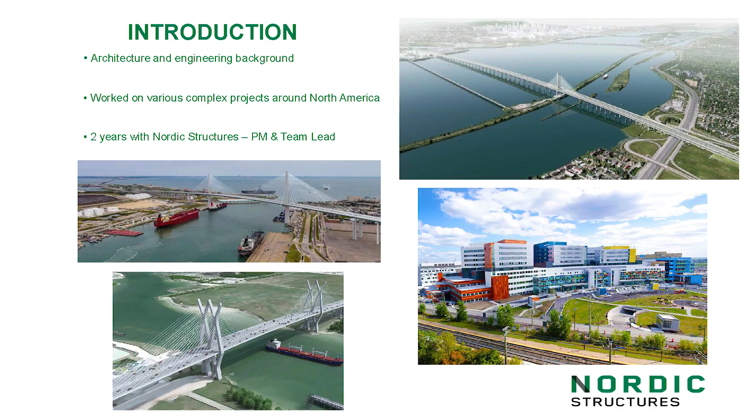I have worked previously to Nordic on various complex projects around North America, namely the new Champlain Bridge in the Montreal region that crosses the St. Lawrence River, as well as the McGill University Hospital, that is a super hospital in the Montreal area. Closer to you guys, I have also worked with teams that have done preparatory work on the Sam Houston Bridge, as well as the Corpus Christi Harbor Bridge.

I've been with Nordic for 2 years now, started as a project manager and am now a project manager and team lead.

Our company, Nordic Structures, is a subsidiary of a company that is called Chantiers Chibougamau. The sawmill and transformation plant is in Chibougamau, Quebec. For anybody that's not familiar with Chibougamau, which I doubt you are, it's about 800 kilometers, so 500 miles north of Montreal in Quebec. So if you see my cursor, it's right up here, and Houston is right down here.

About 2,215 miles from our factory to the San Jacinto College site. We are a vertically integrated company, meaning that we own our own forests, forestry service, and we also do our harvest and replanting ourselves. We have the sawmills that do the transformation of the raw wood, either to construction wood or to our engineered wood products.

It's a privately owned company that was founded in 1961. It's a family business, and I am currently working with the third generation. So some of my colleagues are the children and grandchildren of the founder. We are now 700 plus employees in Quebec. Some of our employees, very few in the States and Ontario as well.

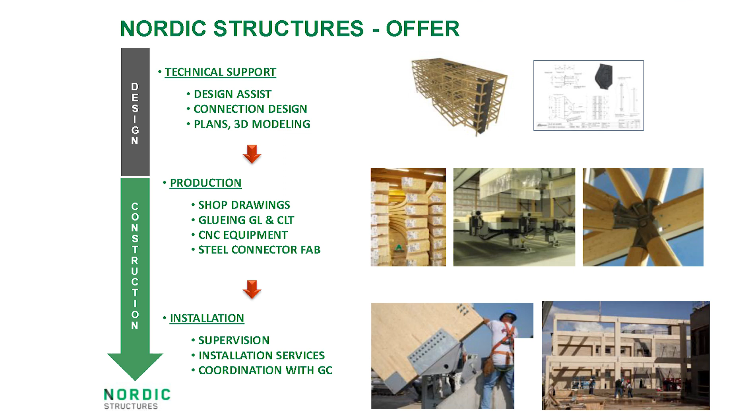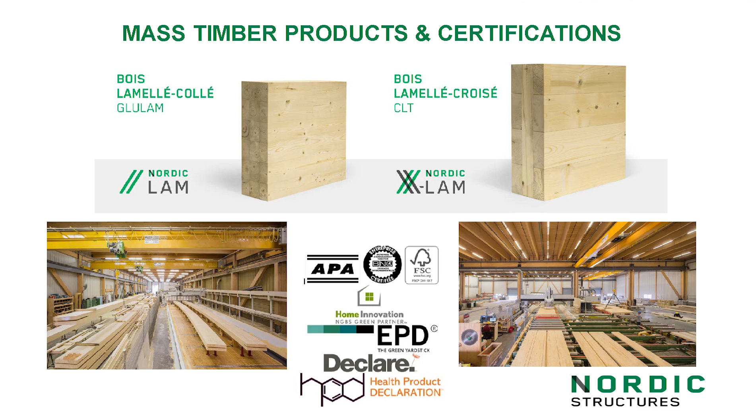I also wanted to do a quick review of the possibilities with mass timber. The projects I'll show are all Nordic projects, specifically in Quebec and Ontario only. If you're interested in seeing more mass timber projects, we have hundreds on display on our website, basically all over North America.

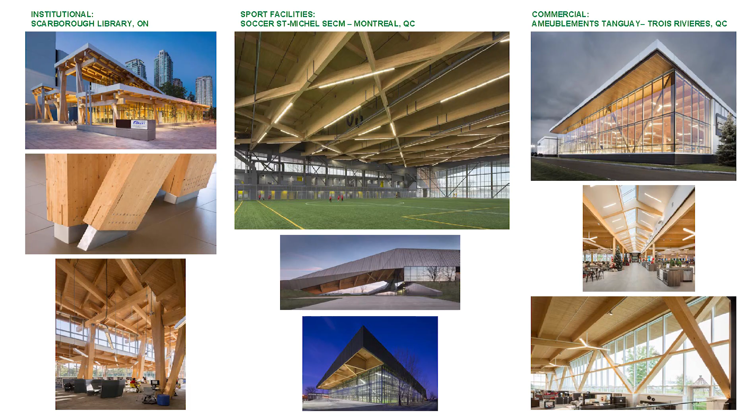We have projects in multiple different scopes of work. On the left is a library in Toronto, Ontario. In the middle is a sports facility in Montreal—the roof beams there are actually 200 feet long and needed to be assembled in 3 pieces to be erected. On the right is a furniture store, similar to the Rent-A-Centers in the States. We have a lot of them all over Quebec.

We also do offices and headquarters. This is the JSK head office in Quebec City. And if you ever drive on the Trans-Canada Highway in the Montreal region, you will also possibly pass this building on the right, which are offices.

Two projects we're very proud of: this is a multi-residential complex in downtown Montreal, actually 5 minutes from the Nordic office. It's 3 buildings, the largest mass timber project in the world still today—600,000 square feet, 434 condo units. It's a project we're very proud of because we developed it as well as built it.

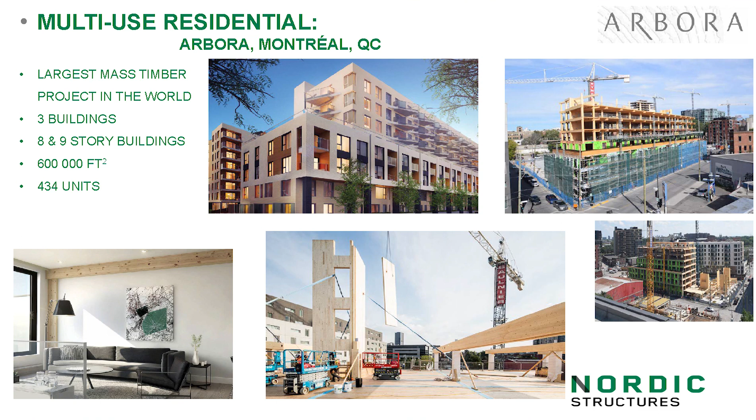This next one is also very interesting because it's the highest all-mass-timber building in North America. That means the envelope walls, cores, and stair shafts are all made of CLT as well—it's an all-timber building. It was erected in 16 weeks, it's in Quebec City, and it's a 13-story building. Here are a few pictures of the erection and the project modeling as well.

We also manufacture timber bridges, which I don't have examples of here, but we do that for our own forestry service and harvest up north. San Jacinto is actually our first project in Texas. There's another one scheduled for this fall in Houston as well, which is actually a CLT floor and roof on a steel structure.

So to get to the main items I wanted to discuss here: Nordic's experience with the San Jacinto project, and the highlights for me as the project manager.

To start off, it might sound ridiculous or simple, but one of the things that made this project work very well and go as planned is that the owner was actively part of the design and coordination meetings. Every meeting I had for coordination with mass timber and the subcontractors, Mr. Smith was there. He always provided his input and was very active on the design side with Kirksey and Walter P Moore. The active participation of the owner helps achieve the final result as desired, and guides your design team, general contractors, and subtrade partners like us, the mass timber manufacturer.

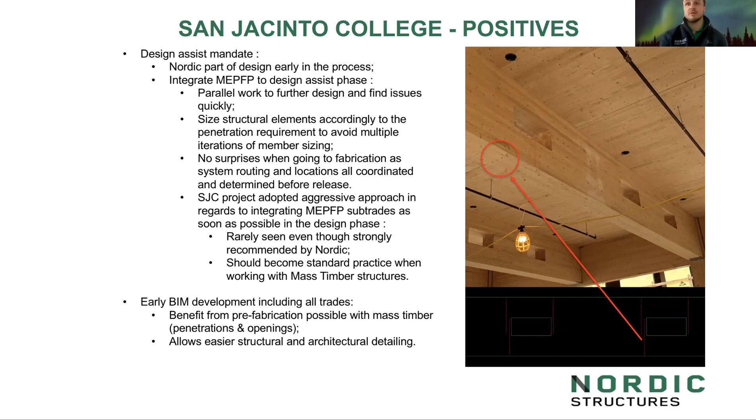The other thing that was started early was the BIM coordination between all trades. That benefits the project because we can prefabricate pretty much everything in the mass timber - penetrations and openings, as I've mentioned before, as you can see again on the right here in the beams and in the CLT slab. It also gives the architect and structural engineer a chance to do their detailing on the model more easily, since everything is in place and routed where it's supposed to go.

I spoke about prefabrication already, but the general contractor on this project was very prefabrication minded. So basically everything that we could prefabricate, we did. And obviously there are multiple advantages to that.

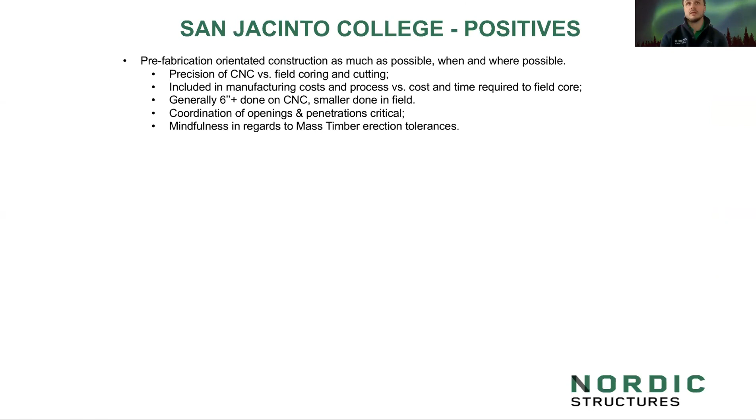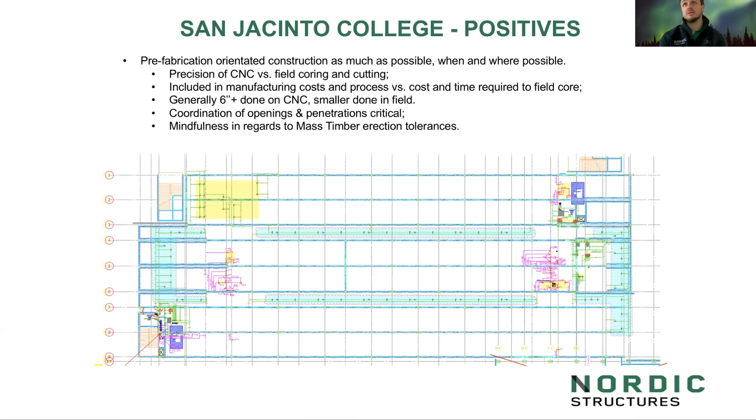One is that CNCs are a lot more precise than when you core and cut in the field, so the cuts are clean, with no wood breaking or flakes around openings. It also saves a ton of time and cost, since it's included in our manufacturing costs. It takes seconds on a CNC machine versus maybe 10 to 15 minutes at site, depending on the size of the penetration, which is very time consuming and costly to do in the field.

Generally, what we recommend is 6 inches plus be done on the CNC, anything smaller done in the field directly. In this case, Tellepsen was adamant that we do as many penetrations as possible in the factory, which is what we did. I think the smallest ones we did were about 2 inches in diameter.

With that in mind, it's important to coordinate the openings and penetrations during the design phase to make sure all the prefabrication benefits can be enjoyed. If it's not coordinated in advance, we still need to fabricate at a certain point, and then everything needs to be done at site, which comes back to the cost and time difference between doing it in the factory versus on site.

The other thing we need to be mindful of is mass timber erection tolerances. We core at the factory with a 1/16 of an inch tolerance on the machines, but erection at site can be a little more since there are multiple factors generating tolerances here and there, like the concrete and benchmark elevations, which are generally critical.

I wanted to show a screenshot of the coordination plan. I believe this is for level 2 of the 3-story building, and all the penetrations in blue were decided to be cored at site.

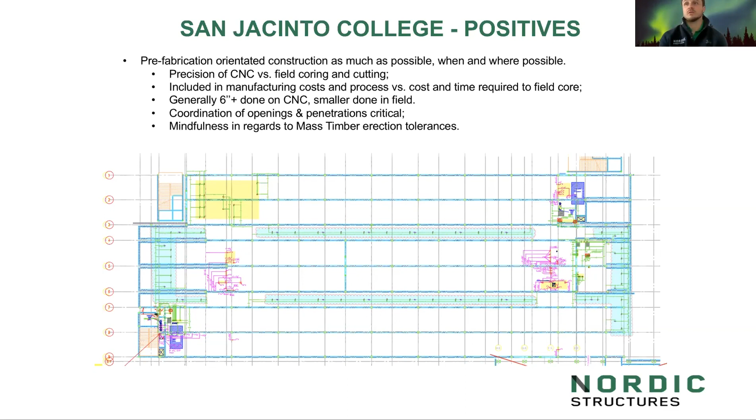We had done this previously on one project, but the client and general contractor were definitely on board with this option: 100% of the wood volume for the project was shipped by train.

One of the benefits of shipping by train, obviously, mass timber is a carbon neutral or carbon sequestering material on this project, and I believe it was mentioned earlier today. We have about 2,500 cubic meters of wood, and generally the agreement is that a cubic meter of wood sequesters a metric ton of carbon. So by shipping by train, we also reduced the project footprint by about 170 tons of CO2.

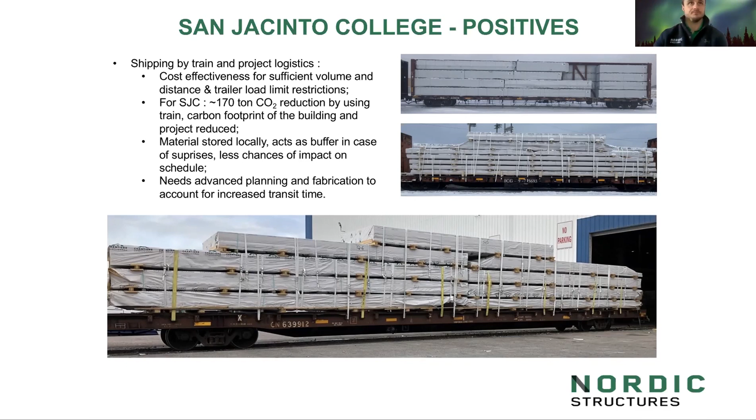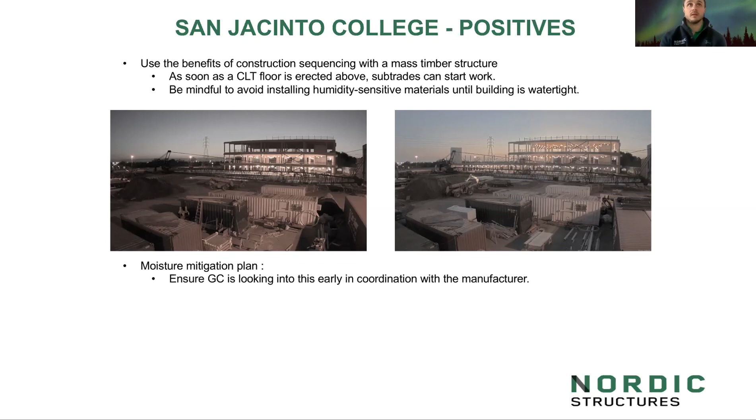One thing to be mindful of is installing any humidity-sensitive materials before the building is watertight. You have to be careful that they don't catch any water, which could eventually create mold. So we always remind people that work can start under the continuing erection, but just be mindful that it's still not watertight.

This brings me to the moisture mitigation plan. The general contractor was very proactive, looking into this early and coordinating with us, asking about our previous experience handling water with a mass timber building. Mass timber isn't very sensitive to water, but it's more about the finish—this is an architectural product to a certain extent, and we want to avoid water staining.

We haven't seen this very often. Hats off to the general contractor for consulting with us and having a moisture mitigation plan in place—that saved a lot of headaches on this project. I strongly recommend anybody looking into mass timber for a building to think about that very early.

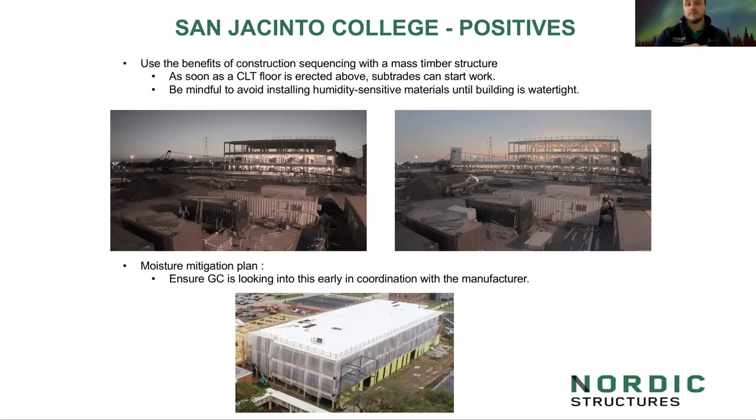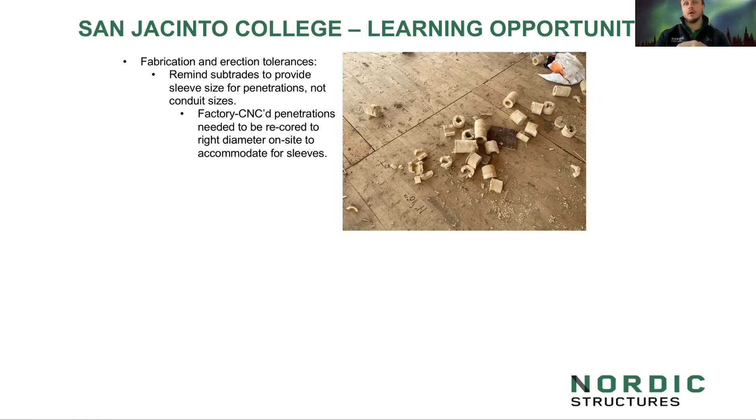With any project, there were a few learning opportunities. I was talking about fabrication and erection tolerances earlier—we had a little snafu with the pre-core penetrations done in the factory. When we got to site, subtrades started trying to install their sleeves in the penetrations and slabs, and noticed the dimensions on the coordination drawings were actually the size of the conduits, not the sleeves. Sadly, as you can see in the picture, we needed to recore a lot of the penetrations that were done in the factory, on site. There were costs associated with that, and more time than we were expecting. So just be mindful of that in coordination during the design phase.

I mentioned installation tolerances for mass timber earlier. Mass timber isn't really any different than steel or concrete—we generally try to stay within 1/4 to 1/2 inch of tolerance from the dimensions on plan. The details, whether architectural or structural, need to be adapted to this reality.

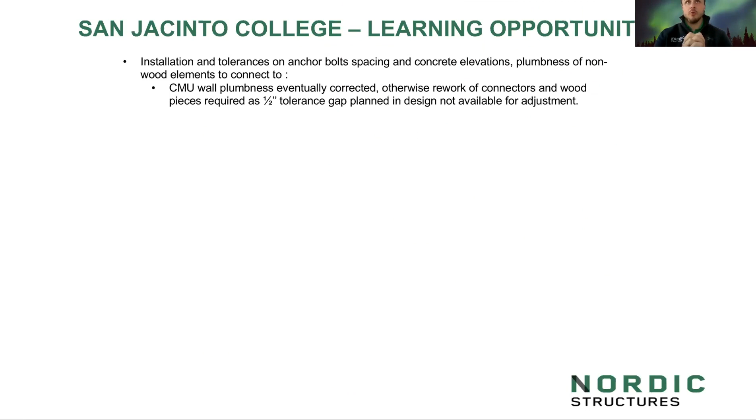In terms of installation tolerances, the important thing to check before anybody gets to site is the anchor bolts and the concrete elevations, and also the plumbness of any non-wood elements that we would be connecting to. Obviously the wood is fabricated within about 1/16 of an inch of tolerance, as I was saying earlier. So it's not always obvious when you need to connect to either concrete or steel.

Finally, another thing I think is very important to remind: we are a mass timber structure manufacturer, and we generally pretty much 95% go off of the structural drawings. So it's important that all the information reflected between the architectural and structural drawings be the same, and also that changes are made clear on the drawings. Mostly, I think the important thing that should translate from architectural to structural is the grid lines and the edge of decks in our case.

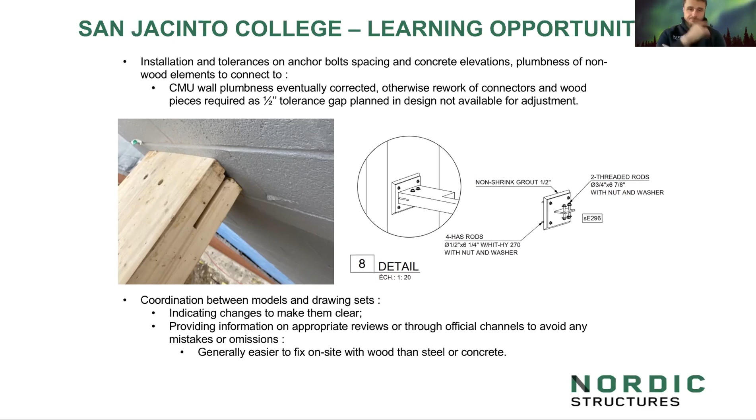I would just like to conclude my presentation with a few pictures of the fabrication process at the factory. I think it's interesting to see the intricate details and the intricate work that we can do with a CNC machine in a material like wood.

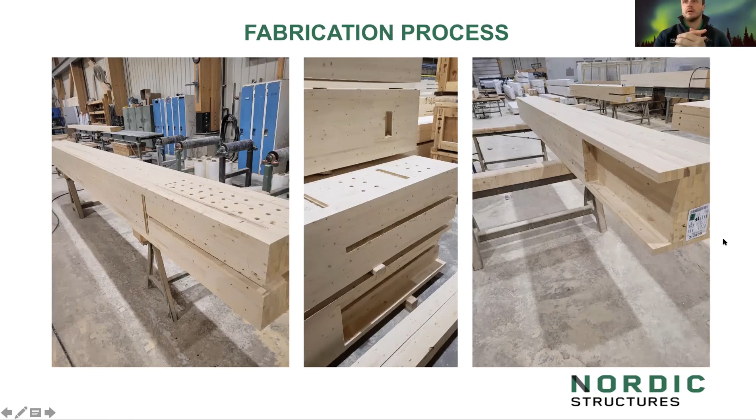Here is another example of beams. We machined the tops for the top plates of the hangers in the factory to spec. You can also see on the left picture here, the sprinkler penetration was machined in the factory, to a 16th tolerance as well, as I was saying.

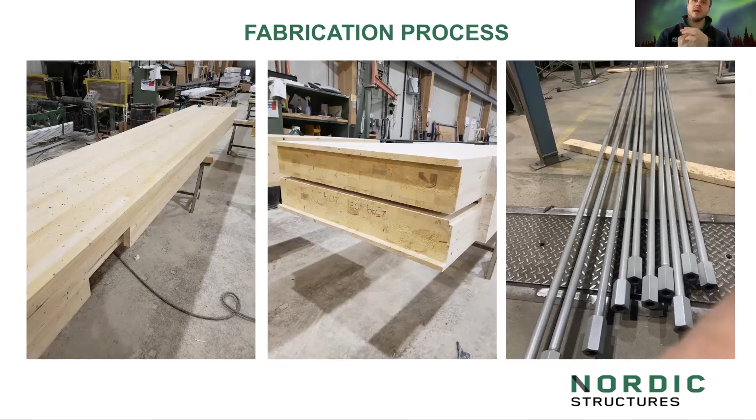In the middle is an example of a knife plate for a hanger. You also have the machining here for the bottom plate where the beam rests for the gravity loads to transfer to the columns. On the right here, those of you that already did the visit will probably recognize the suspended rods for the beams in the lobby.

These were fabricated and powder coated at the factory, and the rods were basically connected by couplers. So all of that you see right now, and that you'll see for the life of the building, is the non-threaded part in the middle. This was powder coated to the architect's desired color in the factory.

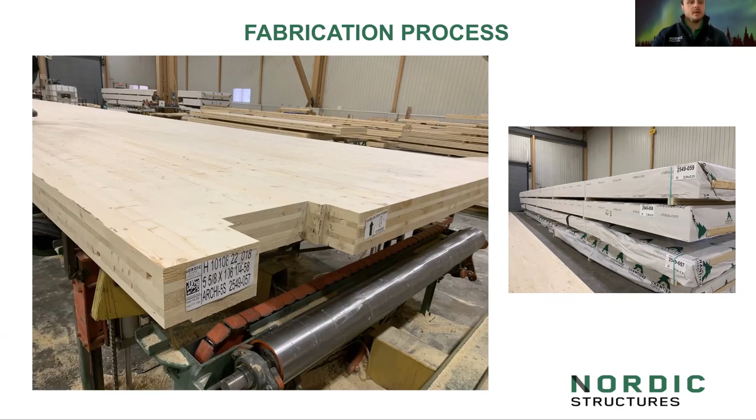And with that said, this is the end of my presentation. Thank you very much for the opportunity again. San Jacinto College Nordic appreciates being a partner on this project. I'm very sad I could not visit today, I would have loved to see the building erected, but I guess it will be for another time.

So let's skip through this stuff real quick. What are we going to talk about today? We're going to talk about what is tall wood and how tall is tall. What is our code allowing us to do, and what are the codes going to allow us to do, what we have seen done, what products are used. I'm going to go through that really quick because we already sort of talked about that.

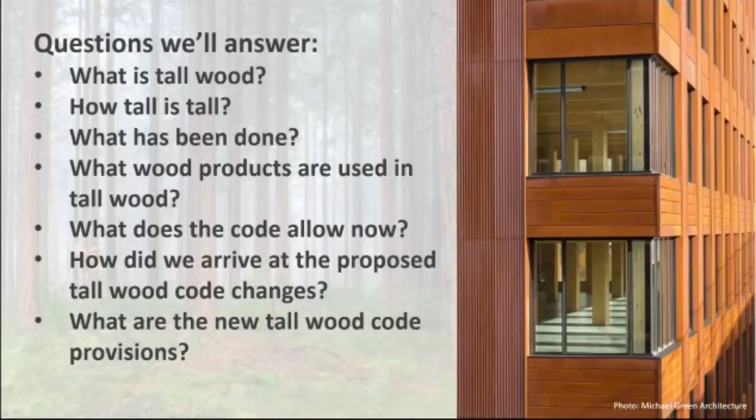We're going to talk about how we arrived at changing the building code and what research we had to do to make everyone assured that what we were doing was safe for the occupants and owners of these buildings. Then I'm going to go through exactly what we're dealing with in the new version of the code.

When you look at the existing codes we have, I'm talking about the IBC 2018 and older, our heights and area limits were really based on some old information, the 1910 Heights and Areas Act. So if you went with B occupancy for wood construction, you were limited to 85 feet and 6 stories. For multifamily, it was 85 feet and 5 stories, although you could squeak a mezzanine in there. Anything taller than that, you had to go through an alternate means and methods request with the authority having jurisdiction.

So you had this limit that was not necessarily based on the performance of how the material could do, but was based on these old prescriptive code requirements that have been around for a long time.

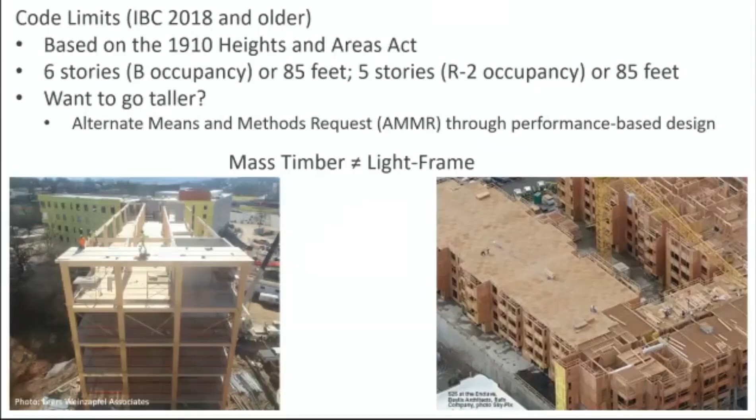One thing I want to stress is that mass timber and tall wood is not light frame construction. We are not trying to go tall with light frame. What we have in our current codes has proven to be very effective for light frame construction, so type 3 and type 5 construction are staying the same, and that's where we'll find light frame construction being used. But with mass timber, we've traditionally been bouncing around between type 3, 4, and 5 construction based on fire resistance ratings and occupancies, and we were still limited to those same heights as light frame. Now we're going to be looking at something a little bit taller.

So what have we seen across the pond over in Europe? We've seen them pushing the limits of what tall wood can do. Back in 2015, that's when we really started to look at going taller than this sort of 6 stories and 85 feet. Over the years it has progressed taller and taller until we get to the final image on the lower right, a project in Norway that was around 14 stories tall. So we were starting to see some projects that were pushing the limit.

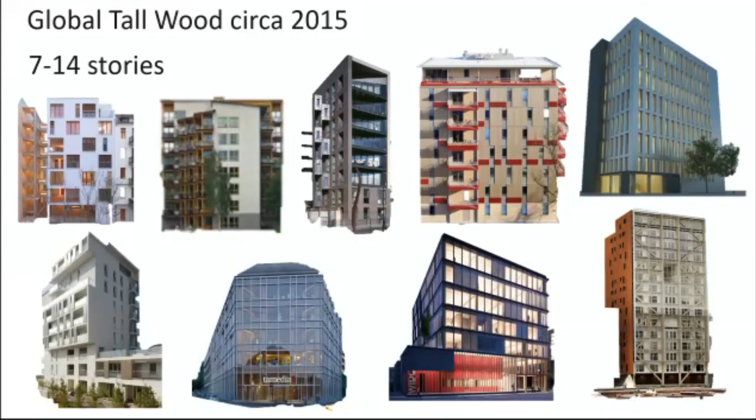And I've got to tour that building. If you ever get up to Minneapolis, go into the Butler Brothers building. It is the coolest thing to see some of these massive solid sawn timbers that came from a single tree, which now have big splits in them and checking, but they're still standing and still performing exactly what they need to be.

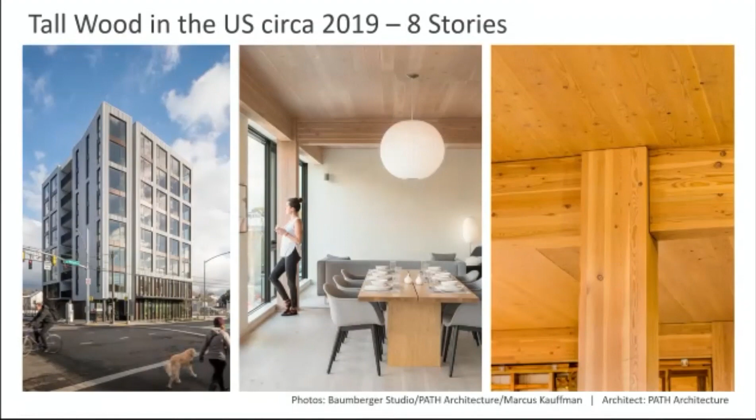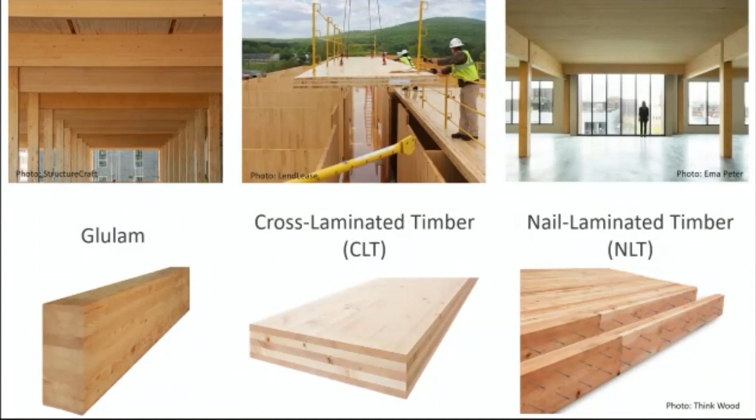So what are the products that we see? I think Kirksey already covered these in a previous presentation, so I'll go through them quickly. Glulam, cross laminated timber, nail laminated timber. Although nail laminated timber has its little niche, you're not going to find any manufacturers mass producing NLT panels. But if you want something where the contractor can self-perform some mass timber installation without involving a manufacturer, they can self-perform an NLT project. It's not very complicated to do. DLT, dowel laminated timber, has sort of taken over.

That's something you can get from a manufacturer that's prefabricated, like mass plywood panels, a close cousin to CLT. Even more traditional materials like tongue and groove decking still comply with heavy timber requirements in the code. There was a project in Sacramento just completed using heavy timber decking, but it's not something that can be prefabricated. It has to be cut on site.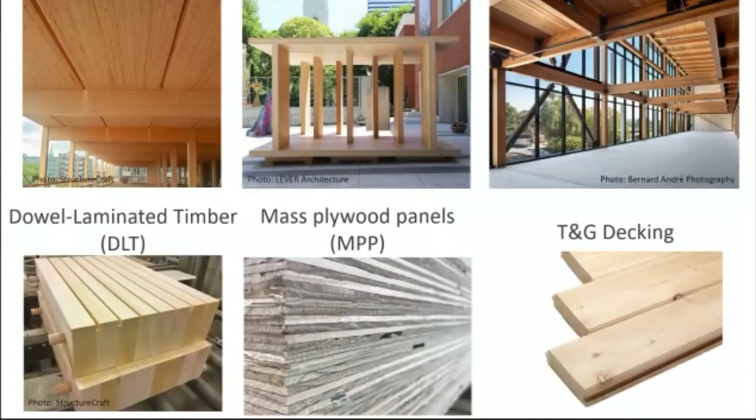We've seen these projects come across the United States in a wide variety of applications, from offices, multifamily, commercial, and educational projects. We've really seen an embracing of mass timber across the United States, and we see a wide variety of buildings.

So what are the drivers for mass timber? I think one of the drivers, if you've been on one of the tours today, is simply the aesthetics of the space. Working and living in a space like that is hard to compare. There are obviously some construction advantages too. Sometimes you'll see advantages in construction speed and potentially reduced foundations, things of that nature. There are a lot of drivers for mass timber, and you're not always going to take advantage of every single one on a project, but there's usually one that's the key that drives you towards it.

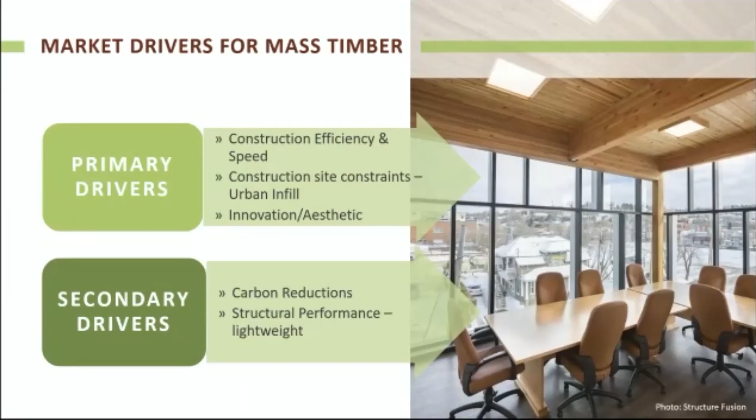This image right here is a perfect example. Now, this image cheats a little bit, because most of the time if you're building in concrete, you're not going to leave the concrete exposed since it's not attractive. You're going to cover it up with some sort of ceiling, which in mass timber you don't have to. So you're able to utilize that structure as the finish and see that beauty in the space.

So it still has to stay underneath that 85 feet. I'm guessing their floor-to-floor heights are pushing that building to where they can probably slide a playing card underneath that 85 feet, and that's about it. But we're starting to see these projects push it by utilizing podiums. The new versions of the code, we won't have to worry about doing podiums if we want to start looking at going taller.

So, building code status. Most of us who are engineers and architects in this room know that every 3 years they tinker with the code a little bit, make changes, some good, some not so good. And then you have to relearn things, and wait for your jurisdiction to adopt it. So every 3 years we have to deal with this.

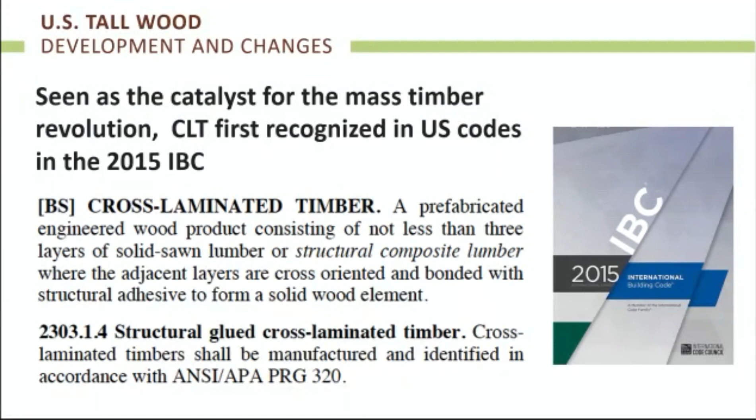So the 2015 code was very revolutionary for mass timber because it was the first one that mentioned CLT. It defines it, lists it as an acceptable building material, and lists the certification for CLT, the APA PRG 320 certification. That was literally the first code that said, okay, you can go ahead and use CLT. Now, CLT was being utilized in projects before this, but mainly where they had to go through that process with the authority having jurisdiction to get approval for it. This laid out a very clear code path that allowed us to use CLT.

NLT has been in the code for years. They call it mechanically laminated decking. It's been around for a very long time, but it just wasn't something that was utilized. CLT was really the product that came in and kicked everybody in the butt to move this mass timber movement forward.

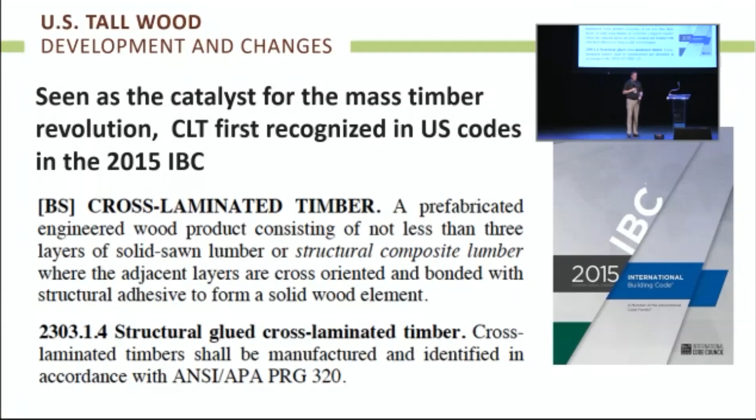So almost immediately when we got CLT in the code, we started looking at all these really cool projects that were occurring over in Europe, up in Canada, and down in Australia. So there was a lot of interest in potentially doing tall wood within the United States. But the hurdle of having to get approval from the authority having jurisdiction was way too much of a hurdle in a lot of cases.

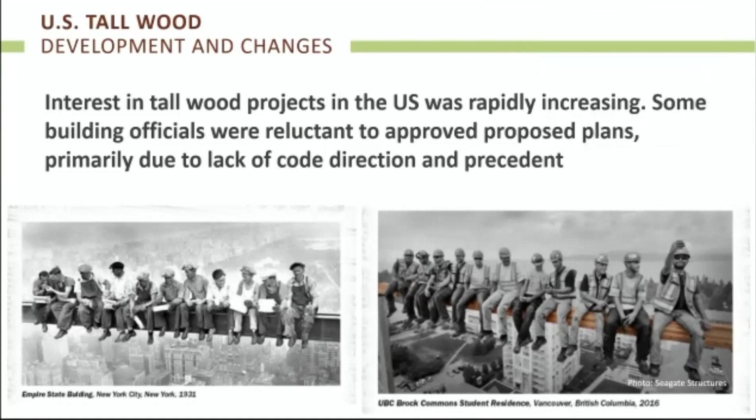That project I mentioned in Portland, Carbon 12, they had to go through a statewide approval project to have an independent group of architects, engineers, and mechanical engineers come in and evaluate the building and make sure it was okay. It's just not something that's going to be pulled off on a lot of jobs. Most of the time, you just don't have the budget to pull off that much additional work to get it through the authority having jurisdiction.

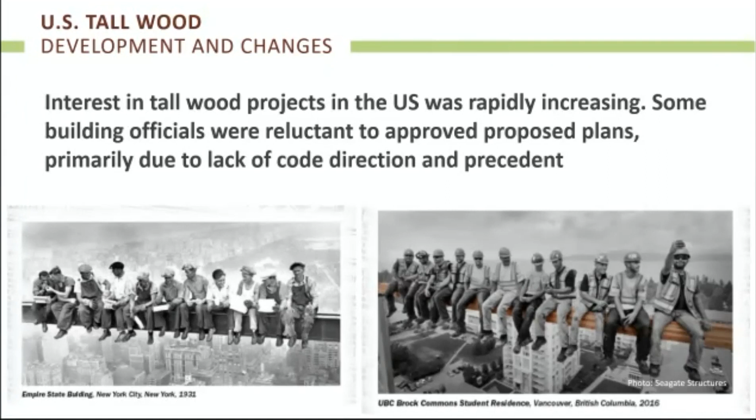So tall wood pretty much has just not really happened in the United States because of that process. But there was still a lot of interest in it. So an ICC ad hoc committee was formed to investigate changing our building code to allow tall wood within it. This all started back in 2015 in December.

They established this committee, and they were going to go through and look at all these different objectives, exploring the science of tall wood, the feasibility of it, and then take action on what those code changes were going to be. As far as a timeline goes, they submitted in January of 2018 for changes that were in the 2021 IBC. So 5 working groups were created, and they had a bunch of meetings where they talked about a lot of things.

There were concrete representatives, there were steel representatives that were in these committee meetings. They were not happy about these tall wood changes. They were not actively trying to get this to happen. And so there's been a lot of debating back and forth—you might have seen ads in magazines that talk about some of these things.

So 82 issues were addressed. The most important one was fire protection and life safety. And obviously, when you start talking about tall wood, you're talking about buildings that can have a lot of people inside them, and you want to basically protect the occupants of those buildings.

If I just stood up here on stage and said, who here thinks building 18 stories out of wood is a good idea? There might be some hands that are like, I don't know about that. 18 stories? That's an awful lot of wood in there. So obviously that's the first thing they needed to address: the fire protection and life safety of the occupants.

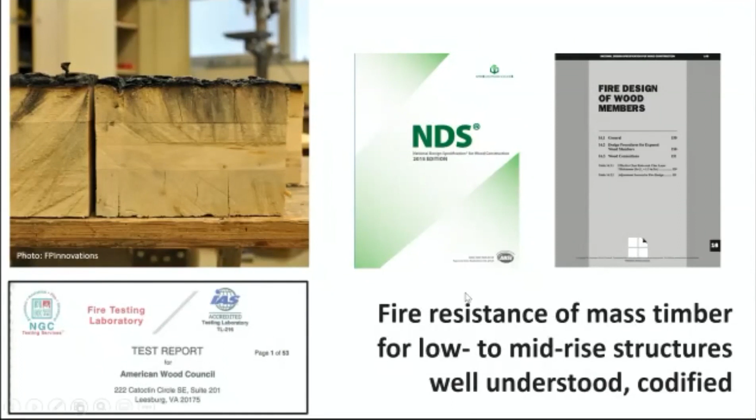But now we're talking about going taller. So are we going to simply rely on this, or are we going to look at it a little bit more in depth? And obviously that's what they did—look a little bit more in depth. So the ad hoc committee established these 6 performance objectives, and the number 1 performance objective is no collapse under reasonable scenarios of complete burnout of fuel.

So in essence, all the stuff that's going to burn within this space burns and goes out, and there's no collapse within the structure—and that's with no sprinkler activation. So that's like worst case scenario, right? And they actually have done a full-scale compartment test of this, and I've got a video of it. It's really interesting to see.

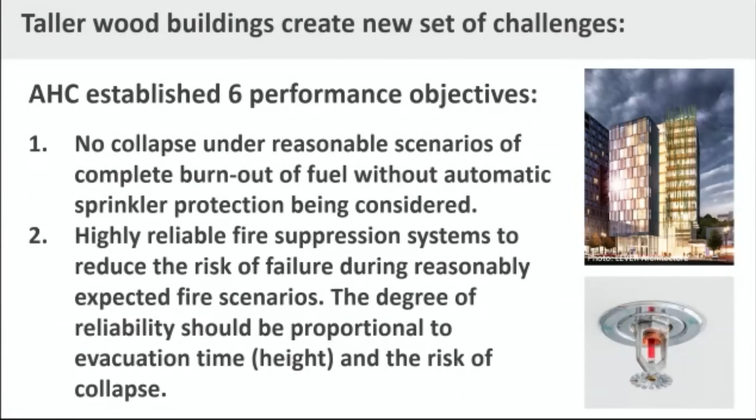Scenario number two: we want the sprinklers to actually work, right? We don't want complete burnout of all the contents, so we want highly reliable fire suppression systems. There are going to be more stringent requirements for sprinklers in a tall wood building than if you were under 85 feet or 6 stories and less. The fire protection engineer earlier was talking about how big the standpipes would need to be for fire suppression. It's something we'd need to consider very carefully to make sure we've got good fire suppression within these tall wood buildings.

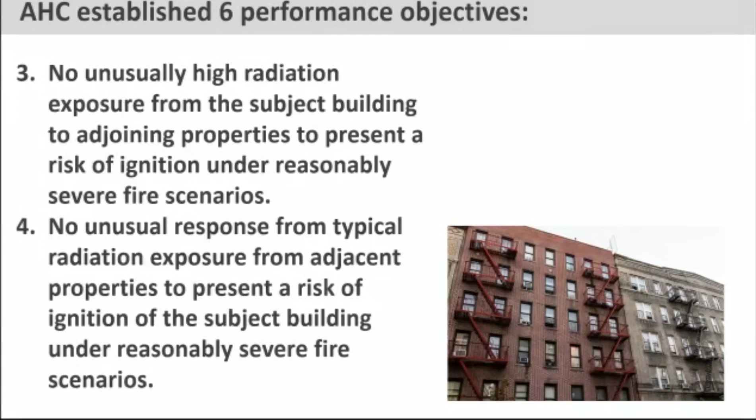Number three and four are related. We don't want high heat generated by our building to catch an adjacent building on fire, and vice versa. There was a well-publicized fire in the UK in a tall building that had combustible materials in its exterior. One unit caught fire, it spread to the exterior skin of the building, and it was a tragedy. So in these tall wood provisions, we're going to have limitations on what can and can't be used in that exterior skin to avoid issues like that.

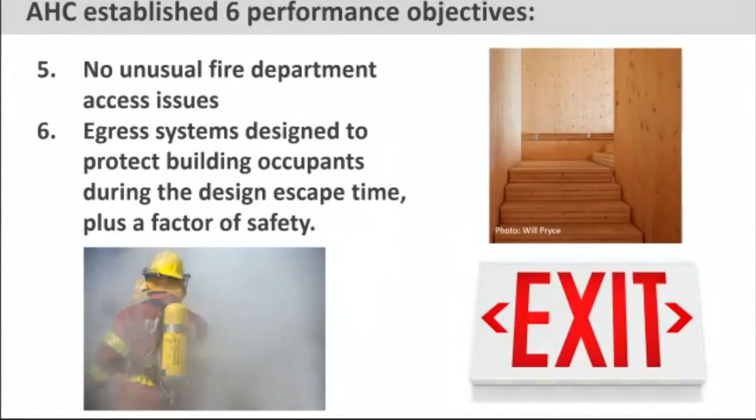The last one: no unusual fire department access issues, and egress systems designed to protect building occupants. So you're going to have more stout fire resistance ratings for those exit corridors.

One thing that was really interesting when I started working for WoodWorks and looking at fire tests is that we test a very limited portion of our buildings. When you talk about the UL assemblies you have to pass for a wall, you're really just testing that one wall assembly. You're not testing a full-scale test, you're not testing the intersections. I've had conversations with Kirksey about the floor system intersecting with the wall that's supposed to be non-combustible, and how you have a 1 hour floor and a 2 hour vertical wall, and how those fire resistance ratings work together. That's the issue that goes along with fire resistance ratings: what happens when they come together.

So a full-scale test was commissioned to create a 2-story apartment, or 2 levels of apartments, with additional weight on top to simulate more stories above. We did a wide variety of tests within these apartments. Here are some images from the spaces. One thing I have to stress: yes, there is fire and flame, but that is the contents of the apartment, not the structure of the building. There's a fire load within these spaces that is set on fire to generate these fires, and that's exactly what they did.

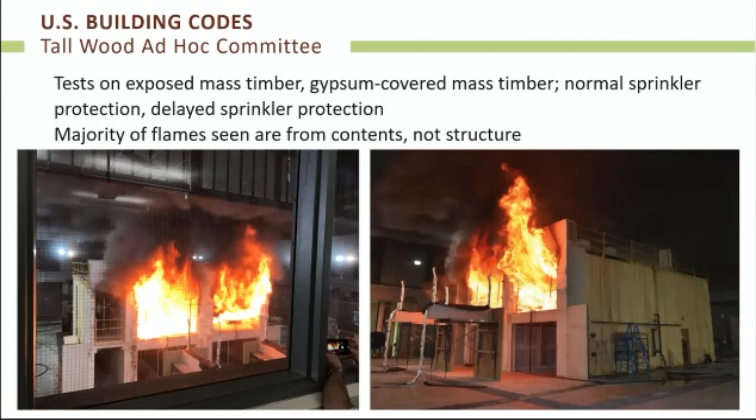Five different tests were done, corresponding with some of these new construction types we'll be dealing with. Test number 1: all surfaces protected with Type X gypsum and no sprinkler activation. So there's no exposed wood in test number 1 - everything covered with gypsum, but no sprinkler activation.

Test number 2: partial exposure of the ceiling. Test number 3: partial exposure of a wall, again no sprinkler activation. So you're going to have exposed mass timber, there's going to be a fire within the space - how does that mass timber perform when it's exposed to fire? But it's only partially exposed, not fully exposed. Tests 4 and 5 are for fully exposed applications.

Test 4 has normal sprinkler activation - it's a very boring test. Test 5 has a delayed 20-minute activation of the sprinklers, and that 20-minute number is interesting. I'm going to play a video of one of the tests where the contents are allowed to burn out, and I want you to remember that 20-minute mark to see exactly how consumed these apartments are at that point. So in test number 5, again, we have fully exposed mass timber.

Sprinklers are delayed by 20 minutes, so we'll see how intense the fire can get within a 20-minute period before the sprinklers actually activate.

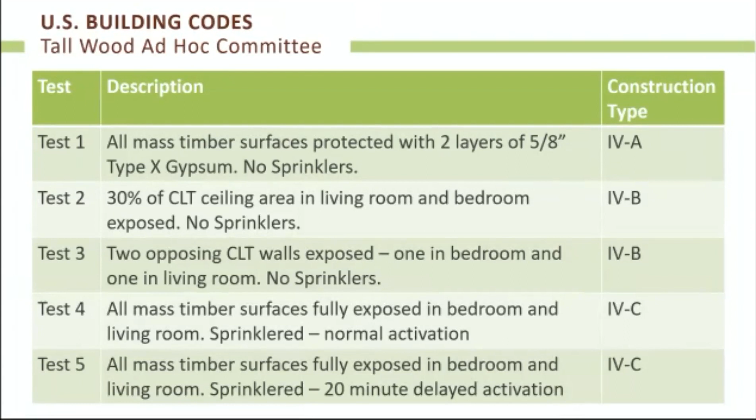Here's some images from test number 1. Again, this is fully encapsulated, so all the mass timber is covered with Type X gypsum. You can see the flames were pretty intense within the test, but it burned out on its own. There was no fire services brought in to put this out. It simply extinguished the rest of the contents, and in essence, it performed exactly the way we wanted it to. All the gypsum was still intact, there was no damage to the mass timber, and it survived the test very well.

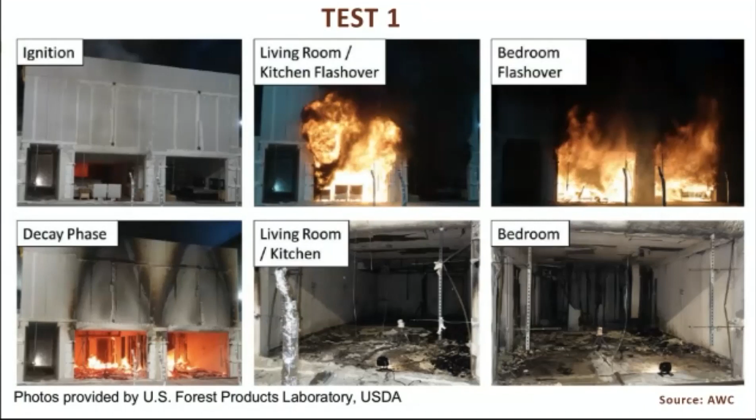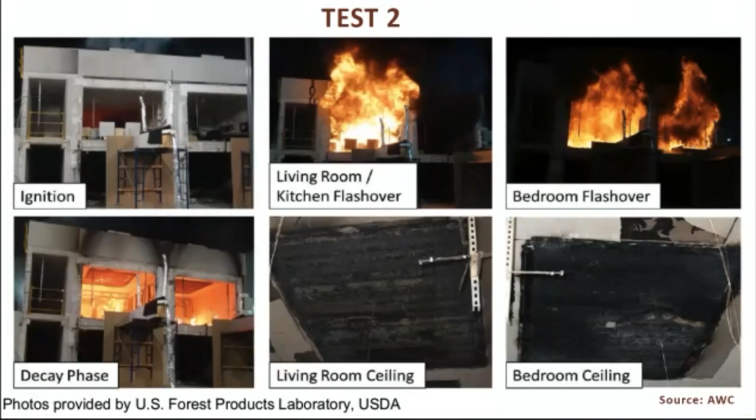Who here has tried to go camping, set a big log on a fire, and tried to light it with a match? It's just never going to go. And if you don't have any small kindling pieces in there, it's going to go out on its own sometimes. So you have a hard time keeping these large sections burning.

Test number 3 is the same test as number 2, except the wall is exposed. Test number 4 is the boring one—that's the normal activation of the sprinklers. The cabinet's got a little charred, that's about it. And then test number 5 is the one where the sprinklers were delayed.

So this is an image of the full-scale mock-up, so you can sort of see exactly what they did. It was a pretty large-scale test. I don't know exactly where that testing facility is, but that's kind of cool.

This image really shows you the contents of what's inside the apartment. You can see there's chairs in there, there's beds in there. But what you'll also notice is there's a bunch of extra wood pallets in there—they actually generated a much larger load than normal for these types of tests.

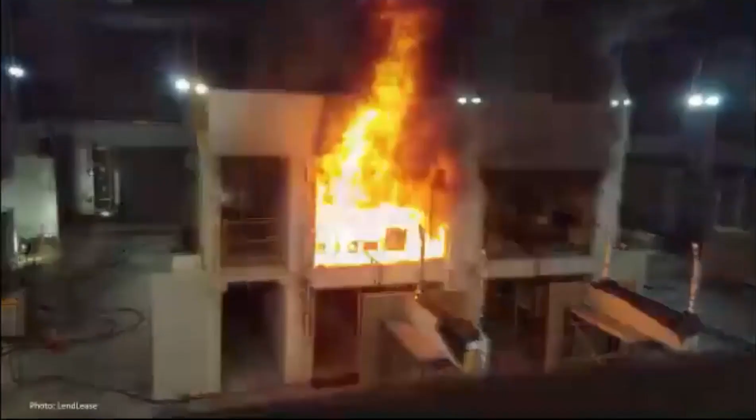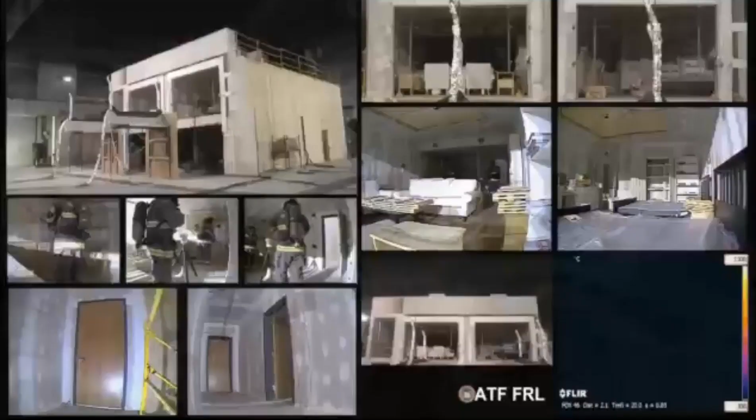So then the fires are always started in the kitchen underneath the cabinets, and then it will spread to the living room and then spread to the bedroom. And once again, despite how intense that fire looks, the structure itself is not what's burning—it's all the contents. Basically it's going to self-extinguish with a few hot spots in there, and the test performs pretty adequately. So this is our video.

There we go, it's starting on its own. So this is the video of the test. This test takes about an hour, but obviously it's sped up at various times throughout the video.

One of the things I want you to keep an eye on is in the lower middle image, that door there—it's a 1 hour rated door. And you'll notice that when we hit about 1 hour in this test, that door just falls over. So it's sort of funny how that 1 hour door works.

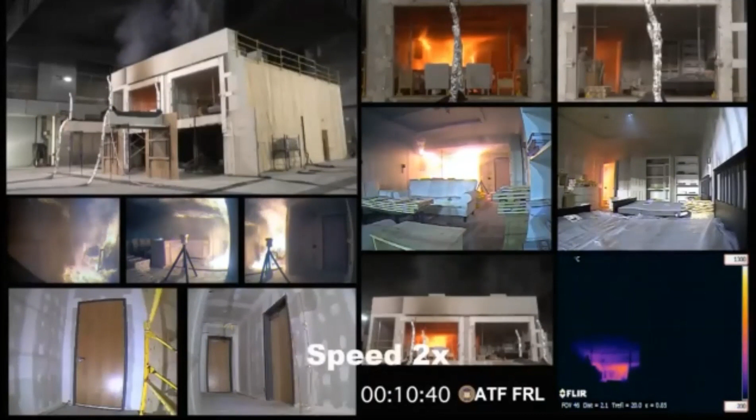Here you can see the fire starts in the kitchen area and then spreads over to the living room space. At various times, some of these cameras will go out because they're obviously sacrificed to the flames.

At this point, we're about to have flashover into the living room, where basically the space gets so hot that everything almost instantaneously combusts at the same time. In the meantime, though, you can be sitting in bed watching TV and you're completely fine—it hasn't made its way into the bedroom yet.

Hopefully the smoke detector has gone off at this point. The thermal image on the lower right is also kind of interesting to see, where you can see exactly how intense it is within the living room space, and it hasn't quite made it over into the bedroom space yet.

Now look at the time at the bottom—this is at 16 minutes. So in that one test that I talk about, the sprinklers are delayed 20 minutes.

So that wasn't the only test that was done, though. There were a lot of other really important tests that needed to be done to prove that mass timber can work in a tall wood structure. So different organizations, different manufacturers have all been doing their own testing to prove their materials can work in this.

Now, one of the things that changed in 2021 is that the PRG 320 requirements for certification were updated. The glues that were used for that certification were updated. And this image on the left shows you one of the most important tests that you might have.

So we know cross-laminated timber is a glued system. You have laminations running in alternating directions, and they're glued together. So what happens to glue when it gets hot? You might automatically think, well, it just melts and it drops what it's holding. That's obviously what we don't want to have happen in a mass timber building or in a tall wood building.

So in essence, what we have are glues that can withstand elevated temperature tests. This image on the left shows a CLT panel that has been put through one of these tests to prove that the glue will not drop a lamination, because obviously that glue softens or fails completely, that lamination drops. Now all your charring is gone and it just starts right over again on that exposed surface. So that's a scenario that we don't want to happen within these spaces.

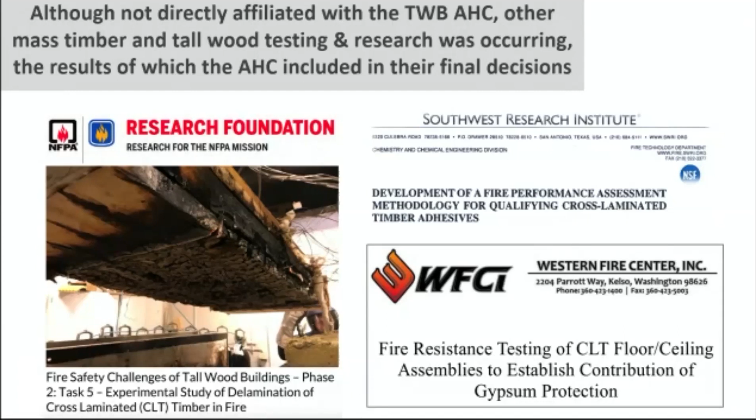So that new certification that I believe all manufacturers are now in compliance with was very vital to get this tall wood application pushed through. So it was approved.

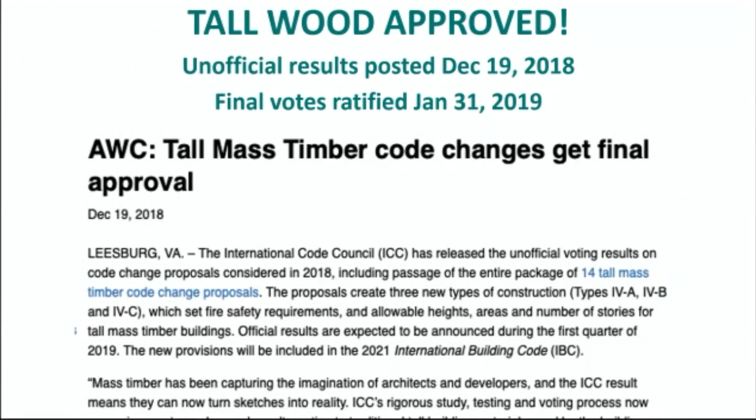Some of these things were approved pretty unanimously. There was a little bit of debate on some, but the changes were approved at the end of December 2018, and the final votes were ratified in January of 2019. Like I said, most everything passed pretty easily. I think the lowest one was right around 70%, and it just required a simple majority. So a lot of these changes that occurred were passed relatively easily.

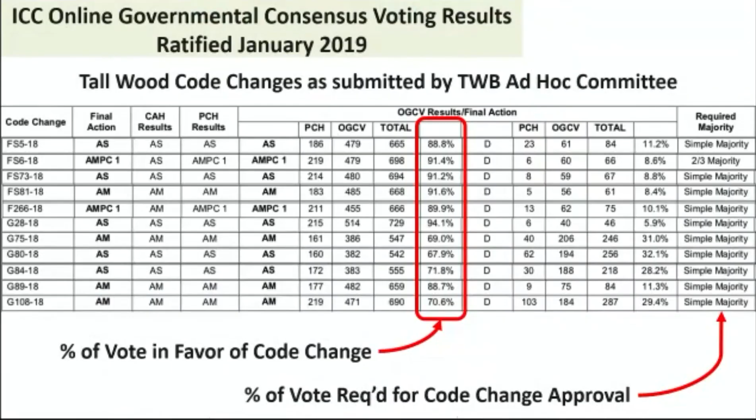So what are these changes? What does this mean for us? Wow, how tall are we going to be allowed to go?

So since the IBC, its original in 2000, the IBC 2000, we've had these 5 different construction types and subcategories of A and B for types 1, 2, 3, and 5 had subcategories. Type 4 didn't have a subcategory. So you had type 1 and type 2 construction. That's going to be pretty clear non-combustible materials. You're not allowed to use combustible materials in type 1 and 2 unless you like reading the footnotes.

Who likes reading the footnotes? Well, if you wanted to put glulam in your roof, then you could read the footnotes and you could put glulams in a type 1 or a type 2 construction, but it can only be used in the roof surface. There had to be limitations as far as heights and all that stuff that you find in the footnotes. But in general, type 1 and 2 construction was limited to non-combustible materials.

Type 3, 4, and 5 allowed combustible materials, and we typically found light frame construction dominating type 3 and 5, with type 4 just sort of being there in case somebody felt like doing some heavy timber stuff, but nobody ever really did that, right?

I had a conversation with a major city in the state of Texas that will not be named, it was not Houston. And they were not even really sure after I met with them that type 4 construction was allowed. And I just was trying, I sat with them, talked with them for an hour.

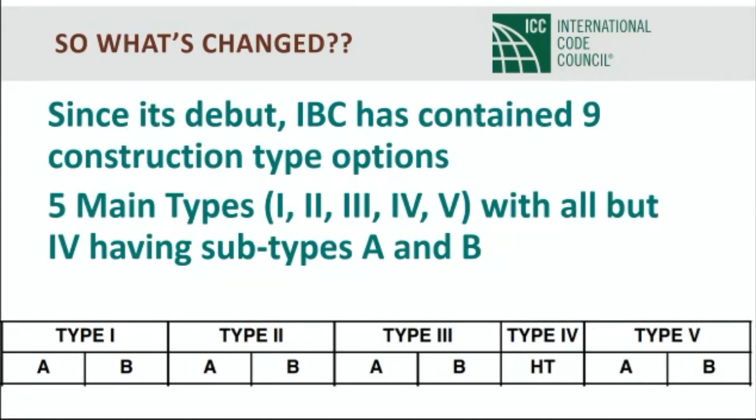The project here is type 3A construction, 3B, okay, I'm gonna make sure I get it right. 3B construction. So we can do concealed spaces in type 3B. So we have lots of areas here with concealed spaces hiding all of that mechanical equipment. And if it's 3B, then we don't have a fire rating for the floor, correct? So we don't have to worry about thickening our floor up for that. So that was a good choice for this project. But in general, you had this debate about whether to use type 3, 4, or 5.

So what's happened though is - yeah, I just went through all that on that slide, I tend to do that sometimes. What happens now is that our type 4 construction is changing, and there's significant changes, I think, to all of it across the board. We have type 4A, B, C, and HT. Now, if you are familiar with type 4 construction at all in the older versions of the code, type 4 HT is that exact same thing, except we're allowed concealed spaces now.

We're going to allow concealed spaces in type 4 construction, type 4 HT. We're still limited to 85 feet. We're still limited to 6 stories for B occupancy. We're still limited to 5 stories for R2 occupancy. So nothing really changes in type 4 HT, except the name gets changed a little bit. But we have this type 4 A, B, and C. And it's not like the A and B in the other ones - this is all based totally on heights and areas, A, B, and C for this. So that's what the big change is.

So what are they? Here's our new building types. Type 4A, we're gonna get to go really tall - up to 270 feet and 18 stories. Again, like that Minneapolis project I talked about that was 7 stories tall, you can put a concrete podium underneath this. You can do 18 stories of mass timber, then you can do a concrete podium. You just got to make sure it's underneath 270 feet tall. And we've got a project that's looking very similar to that type, except it's got cooler stuff on it that I'm going to talk about here in a few minutes.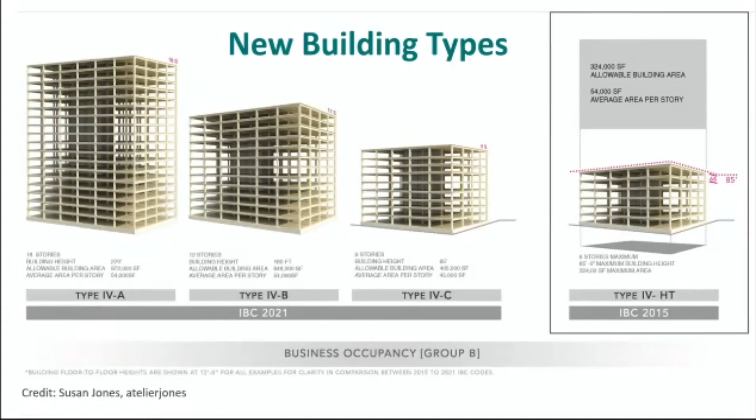And then type 4C, fully exposed mass timber, but we're limited to 9 stories and a height. I'll talk about that in a second, because - who's ever seen anything in the building code that just doesn't make any sense? Why is everyone laughing? It's the building code. All right, so let's talk about these in a little bit more detail. Type 4A construction, 18 stories, 270 feet. This is very similar to the project that occurred in British Columbia, the student dormitory for Brock Commons.

So they had this 18-story building. It was actually 17 stories of mass timber on top of a 1-story concrete podium. But if you see that image on the lower right, everything's covered up with drywall. There is no exposed mass timber within that.

Now, what was really cool about this project is that the 17 stories of mass timber were erected in a little over 2 months. So they went from a concrete podium and 2 elevator cores made out of concrete to, in essence, a fully topped out building in a little over 2 months. That's how fast they were able to go with that mass timber installation.

And this project also, we talked about prefabricated exterior elements. This project had prefabricated exterior panels as well. So not only did the building go up in that 2-month time frame, but the exterior envelope went up in that time frame, allowing them to get the building done very fast.

The other thing that was neat about this, 1 dumpster full of waste material on the job site. That was it. So they didn't have to go through a million dumpsters. All those little things add up cost-wise.

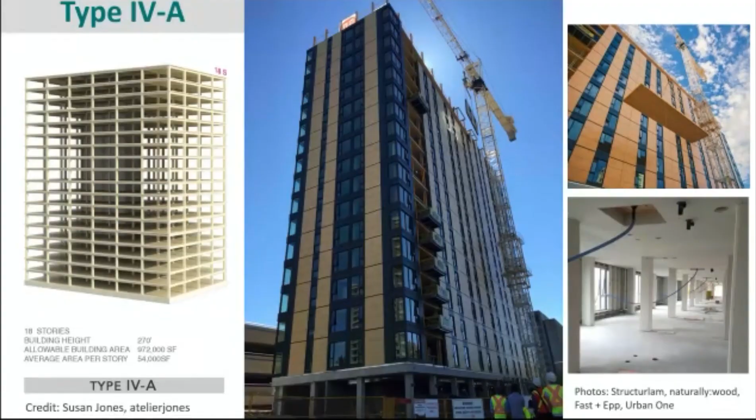So 100% non-combustible protection on all mass timber surfaces. That's the big, I wish we didn't have to do that stuff. Now, future versions of the building code, we might start to look at pushing beyond 100% coverage. But for now, what we're dealing with is 100% non-combustible protection on top of all the mass timber.

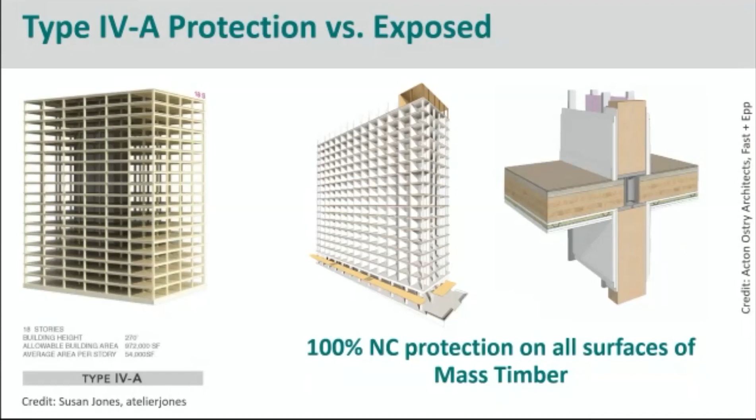So heights and area wise, for B occupancy, where this is probably going to be the most popular, or possibly R2 for residential, 18 stories, 270 feet in height. And you're talking about some pretty substantial building areas as well. You're talking almost 1 million square feet, which you could probably push over 1 million square feet if you look at frontage increases for that B occupancy type. So we're talking about substantial projects.

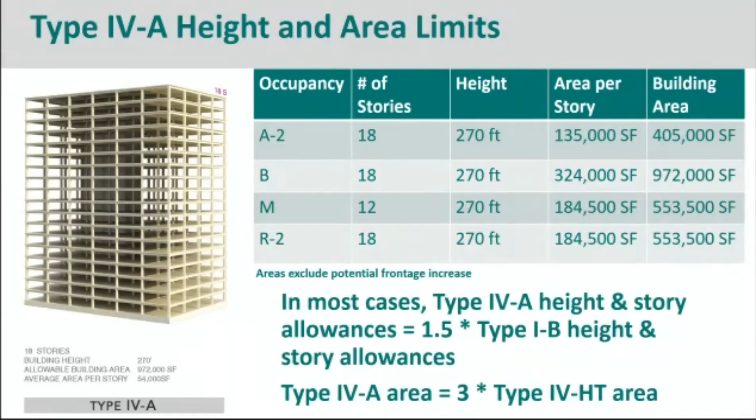Again, you don't build very many of these, but if you're going to build an 18-story building, it might be worth looking into mass timber as an option, as opposed to your more traditional concrete or steel for that type of structure. Type 4B construction,

we're going to allow partially exposed mass timber. How much? Not enough, I'll tell you that right now. I want to go for 100% exposed mass timber, but they are not going to allow you to do fully 100% exposed mass timber at 12 stories and 180 feet.

So what we're talking about is 20% of the ceilings or 40% of the walls. That's if you have mass timber walls, which in all honesty, we don't see that often - load-bearing mass timber wall systems in buildings of that height. Most of the time it's post and beam construction and you don't have any mass timber walls. So in essence, what you're looking at is 20% of the ceiling is what you're going to allow. That's not a lot. It's just not a lot.

It's not enough. We need to do more. Why is it so low? Because the testing that we had done to prove the tall wood stuff was done back in like 2015 or 2014. And we weren't really thinking at the time that this information was going to be used for a potential construction type with exposure. And when committees say, well, you only did a test where you exposed 20%, that's all we're going to allow you to do. So we could have done a test with 40% or 50%. It probably would have passed, but we didn't do that test.

So there's new testing going on right now that is going to improve this within the next version of the code. If you do have mass timber walls and you want to expose 40% of them, and you have mass timber ceilings and you want to expose 20% of them, you got to separate the two. You can't have a wall that goes up into the ceiling. You got to separate them because they weren't done in the same test either.

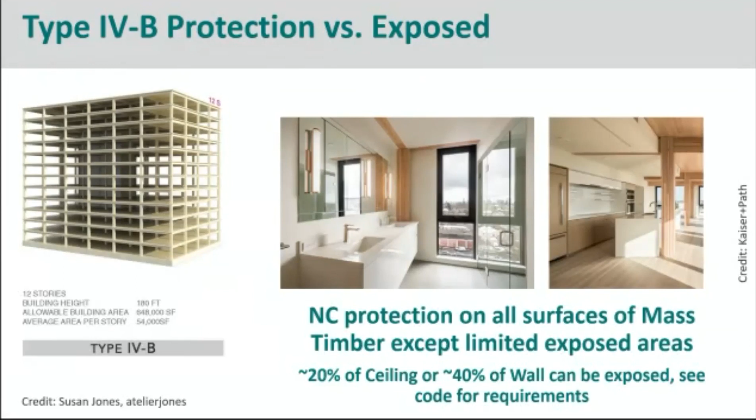Anyway, so again, heights and areas, 12 stories for the most popular types, B and R2 occupancy, 650,000 square feet just about for B, and about 370,000 for R2 occupancy. So pretty decent sized buildings.

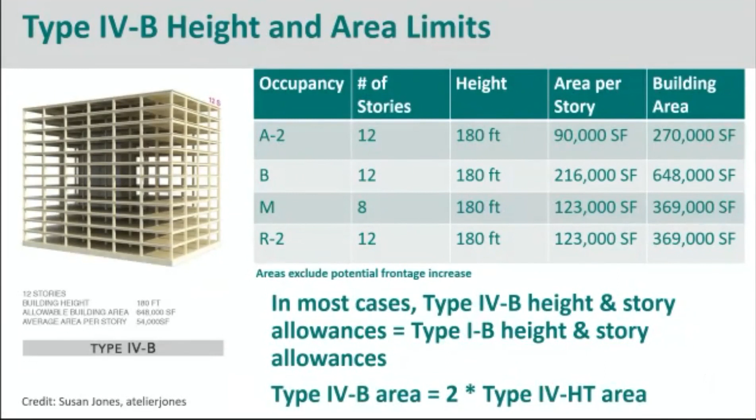All right, types 4C construction. Now we're talking fully exposed mass timber, right? 9 stories tall. Excellent. 85-foot limit. What?

9 stories, 85 feet. Can anyone squeeze 9 stories into 85 feet? Is it dumb? It's in the code though. I can't change it. I can't get my white out and put in 10 stories, or 95 feet. It's the dumbest thing I've ever seen in the code, and that's saying something. But that's unfortunately what we're dealing with.

So in essence, what we're looking at is really still that 85-foot limit that you could have gotten with type 4 construction with a podium. Now you can do it with a fully exposed mass timber. But I'm going to caution you about that, because you're going to have a fire rating now with type 4C construction. And if you know anything about type 4 construction, there's in essence no fire rating.

What that means is you have minimum sizes your members have to meet, but there is no 1 or 2 hour rating for the primary structural frame. There is for the exterior building envelope if it's load bearing, but it might actually be less expensive to build type 4 HT with a concrete podium than type 4C fully exposed mass timber. So you want to really look at that very closely.

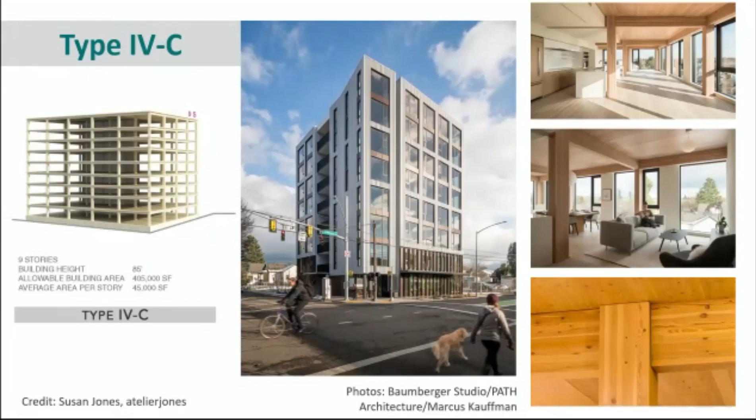If you're looking at a 7-story building that you want to do out of mass timber, really evaluate exactly what's going to be the most cost effective. But it is a start. Hopefully the next version of the building code, that 85 feet number is going to get changed to something else. But we can do fully exposed mass timber.

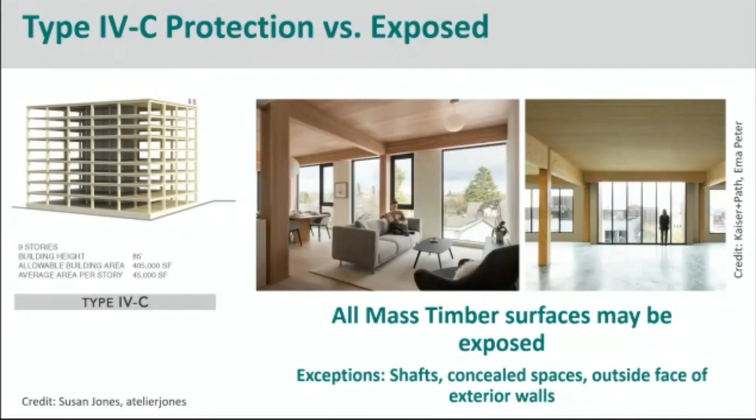We also can do concealed spaces within all of these. Obviously, if you do have concealed spaces, they're not going to allow combustible materials. So I say fully exposed mass timber, that's except for the concealed spaces. You're going to have non-combustible protection within those concealed spaces.

And again, we got 9 stories for B occupancy, 8 stories for R2, but we're again still limited to our 85 feet in height that we are saddled with type 3A construction as well as type 4 construction.

All right, so in essence, what we're dealing with is now we're sort of comparing these type 4 constructions to what we see in type 1A and type 1B. You're never going to get up to the unlimited heights and areas of type 1A, although if you pay attention to mass timber articles at all, there was an article that came out recently, I'd say within the past year maybe, about a 70-story mass timber skyscraper in Japan.

That was a study that was done. That's great. Let's go to 20, 25 first before we start jumping to 70. So we'll get there, but we're not going to compete with type 1A unlimited at this point. That's really what type 4A is talking about as far as heights and areas for a large majority of type 1A projects. And then type 4B compares more or less to type 1B construction as far as your heights and areas. So it's very similar in the limitations on those.

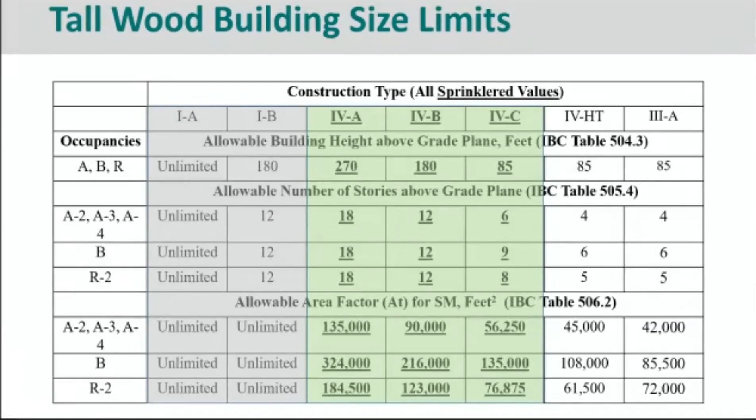So what are we talking about with fire resistance ratings though, right? We want to make sure this stuff works. So what is our fire resistance rating for type 4A? It's going to be primary frame or bearing walls, 3 hours throughout the building, 2 hours at the roof. That's going to be a combination of non-combustible protection in addition to wood charring. So you're going to get part of your fire resistance from non-combustible protection, part from charring. And if you want to go through this in more depth, we actually have a handy paper that goes through this more.

And then as you go down to type 4B to type 4C, your fire resistance ratings will drop a little bit, although there's not really much difference between type 4B and type 4C. That's why I urge you to look at type 4 HT construction if you're considering type 4C, because look at that, your floor construction has a 2-hour rating, but in type 4 HT, it in essence has a 0-hour rating. It just needs to meet a minimum thickness requirement, which is probably going to be met simply by the structural or the vibration design of the floor system itself.

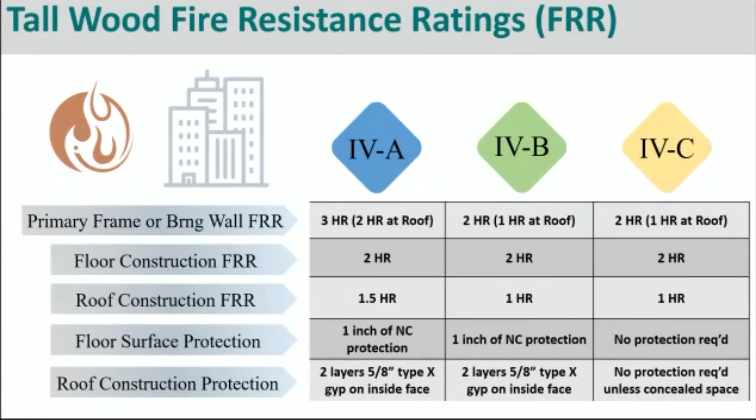So if you're looking at type 4C construction, you might be saddled with additional fire resistance ratings that you may not have to worry about with type 4 HT. But there are other subtle little differences in there as well, concerning partition walls and fire ratings with them. So you need to look into the issue very closely when you're looking at that. So what are we talking about with the materials?

Exterior walls, you're allowed to use mass timber, but they have to be protected with gypsum, mass timber, or non-combustible materials.

This is the other thing that comes up. If any of you have done type 4 construction, it talks about fire resistance requiring members to meet minimum heavy timber requirements. But it doesn't say anything about what steel has to do in type 4 construction. It doesn't say you need a 1 hour, 2 hour, or 3 hour rating for a steel element in type 4 construction. We've all been in heavy timber buildings with bolted connections, plates or bearing plates or seats that beams sit on. If those are steel elements, do they need intumescent paint? Do they need a 1 hour or 2 hour rating? The code doesn't say at all in type 4.

It's very frustrating because I've had architects call me and say, well, we want to put a steel column here for this. And I go, well, you need to figure out what you want to do, and hopefully the authority having jurisdiction is okay with it, because there's nothing in the code.

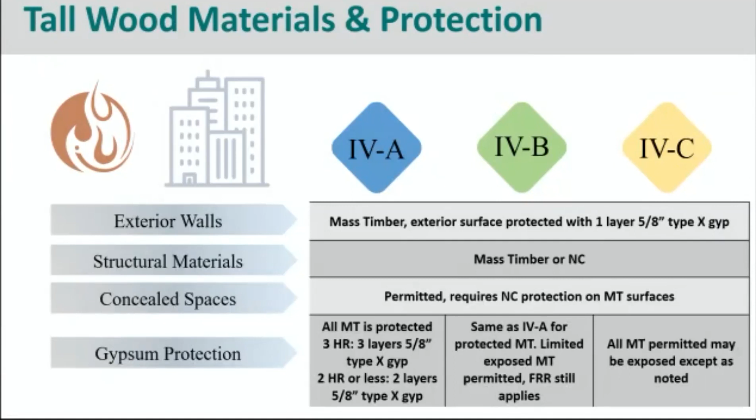Now in type 4A, B, and C, it's very clear. You can use non-combustible materials, you can use mass timber, but you just have to meet the fire resistance rate, whether it's 2 hours, 3 hours, 1 hour, whatever it is. So if you have exposed steel, you need to provide 1 hour of fire resistance, spray fire resistance, or intumescent paint, whatever the case may be.

Am I doing time? I'm doing okay.

What's exciting is that some of these projects are already starting to happen even before the IBC 2021 has been fully adopted. We've had some jurisdictions approve it early, or the tall wood portions of it. There was just one the other day, Massachusetts maybe. Oregon has, Washington has, California's looked into it, Utah has, the city of Denver has. There are already jurisdictions embracing these tall wood code provisions.

These last two projects I want to leave you with are really interesting. This is called Intro in Cleveland, a 9-story project, 8 stories of mass timber over a 1-story concrete podium. This has been through a very long process but is now under construction, with mass timber already installed. This is happening, it's real. Two years ago at the Mass Timber Conference, I spoke with the building official from the city of Cleveland who looked into this project and approved it ahead of time. We were already looking at the tall wood provisions, but nothing had been codified yet, so they basically adopted the early draft versions of what the tall wood code was going to be.

What's interesting is that I told you before there's a 20% limit on exposed ceilings. This project goes beyond that. I believe they're pushing it closer to 40 or 50% of the ceilings being exposed. So we already have precedent being set that we can expose more of this mass timber in what would be type 4B construction.